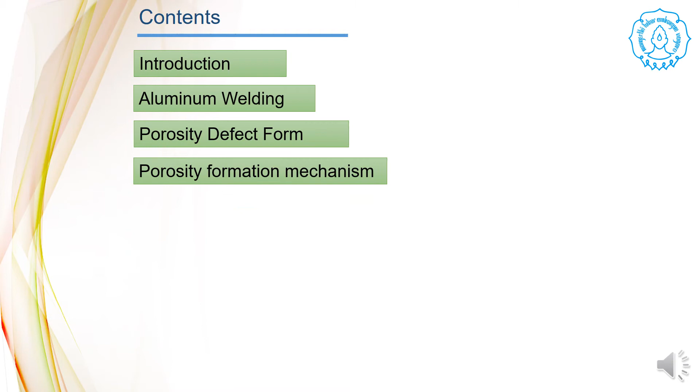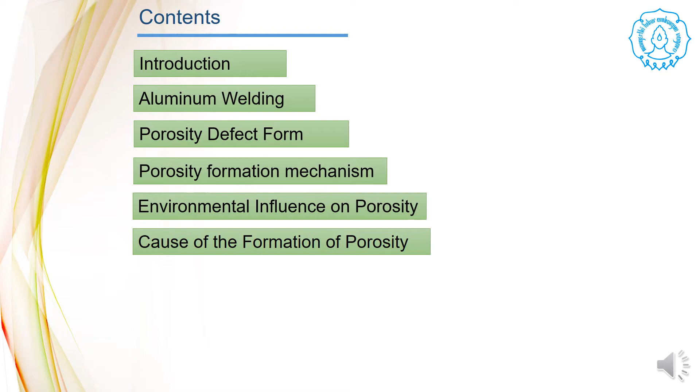Content. Number 1, Introduction. Number 2, Aluminum welding. Number 3, Porosity defect form. Number 4, Porosity formation mechanism. Number 5, Environmental influence on porosity. Number 6, Cause of the formation of porosity. Number 7, Impact of porosity on mechanical properties of weld joints. Number 8, Reduce porosity defects. Number 9, Conclusion.

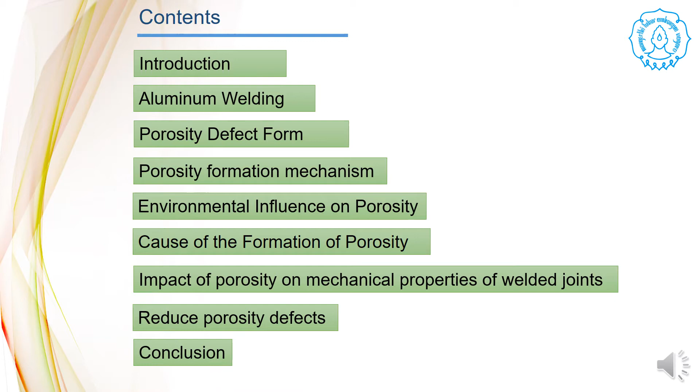Introduction. In modern times, aluminum is widely used in the automotive, railroad, and marine industries. Aluminum is widely used because it has the advantage of low density, high strength, and corrosion resistance.

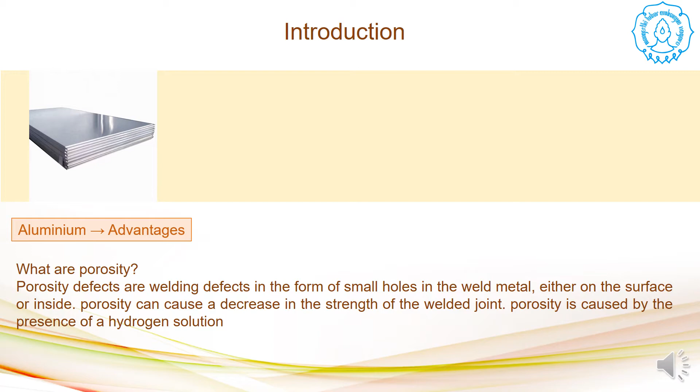Manufacture of marine vessels use a lot of aluminum. One of the shipbuilding processes is to use welding techniques because it has high strength, relatively fast processing, and low cost. Welding processes that are often used are gas metal arc welding and gas tungsten arc welding.

However, aluminum also has this disadvantage, namely the emergence of porosity in the area of the weld joint. Porosity is caused by the presence of hydrogen.

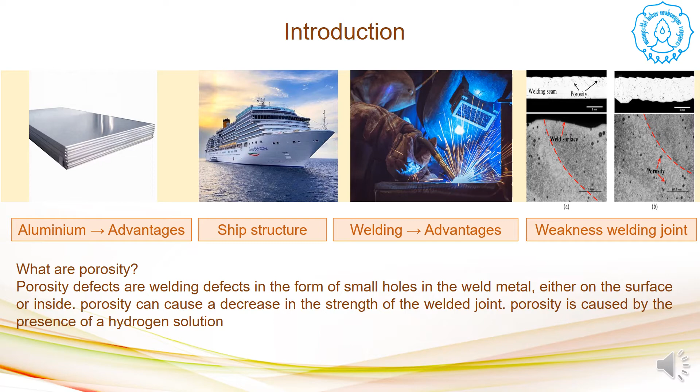Aluminum welding. Aluminum welding process usually uses GMAW, gas metal arc welding, GTAW, gas tungsten arc welding, and CMT, cold metal transfer.

GMAW process. GMAW is a welding process that produces metal fusion based on metal fusion at high temperature by forming a welding arc between the filler wire and the workpiece. The GMAW welding process occurs when the welding wire is directed to the workpiece. The welding arc will generate heat and melt the welding wire with the workpiece metal to melt together and form a permanent joint.

GTAW, gas tungsten arc welding. GTAW is a type of welding that is often used in ship construction welding. GTAW is the most suitable welding technique for joining AA5083 aluminum alloys compared to the GMAW process. GTAW welding has many advantages, including high welding time, reduced use of filler wire, relatively low cost, and low distortion.

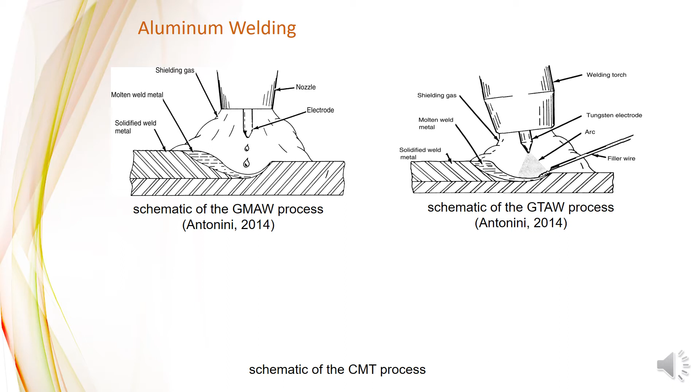CMT, cold metal transfer. CMT is a modification of the MIG welding process, has a low heat input process, and uses the mechanical droplet cut method. CMT welding works by joining material with a high deposition drop transfer method and low heat input, resulting in a very low spatter. CMT welding advantage is that it can increase welding efficiency, flexibility, welding speed, and tensile strength.

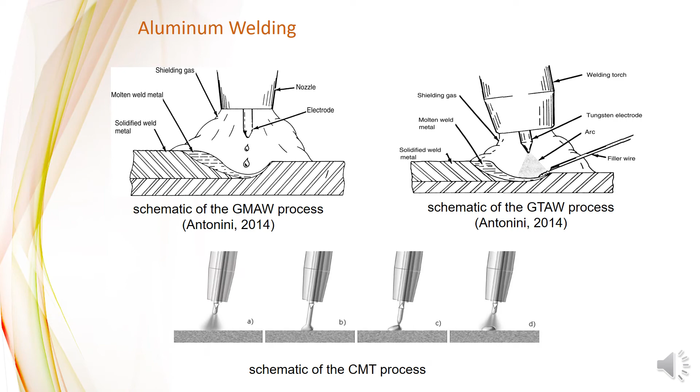Porosity defect form. Number 1, Microporosity. Microporosity is formed due to two mechanisms: shrinkage porosity caused by the shrinkage during the metal solidification process, and gas porosity caused by air trapping and undissolved hydrogen. Microporosities are generally below 5 millimeters. Microporosity can cause reduced tensile strength and fatigue.

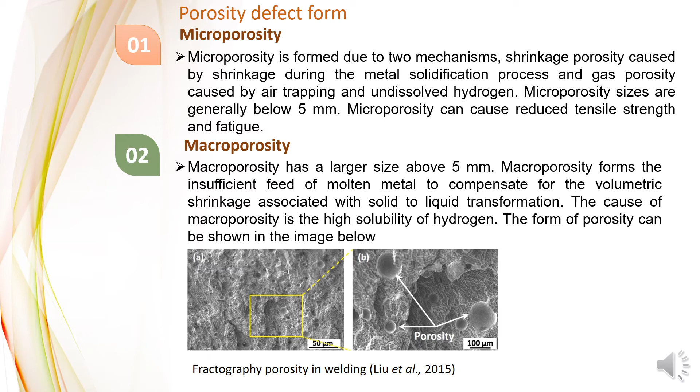Porosity formation mechanism in welding. Porosity can occur in the MIG hybrid laser welding process. During the MIG hybrid laser welding process, H2O reacts with the molten metal to produce hydrogen atoms. Hydrogen atoms are easily dissolved in the molten pool at high temperature. During the welding process, the hydrogen atom solubility can decrease as the temperature decreases. The solubility of hydrogen atom in the molten pool can affect porosity formation.

The porosity formation mechanism during MIG hybrid laser welding can be seen in the figure below. During the heating process in MIG hybrid laser welding, the molten pool area contains a solution of hydrogen atoms. The dissolved hydrogen atoms form bubbles. The movement of hydrogen atoms is influenced by the flow behavior of the liquid metal. The cooling process causes the solubility of hydrogen to be reduced, and the hydrogen bubbles cannot escape from the molten pool of melt, causing porosity. The shape of the porosity is irregular and has a larger size.

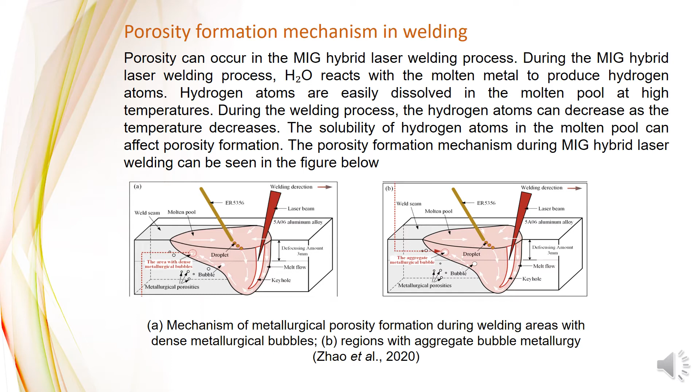Environmental influence on porosity. Number one, air temperature. Air temperature is one of the environmental parameters that affect the occurrence of porosity in a weld joint. During the welding process, porosity usually appears in the weld metal area due to the high solubility of hydrogen in aluminum at the aluminum melting temperature. The increase in air temperature causes the solubility of hydrogen when the aluminum is melted, and in welding, melting occurs, which causes hydrogen gas to be trapped in the weld metal, resulting in porosity.

Number two, humidity. Porosity causes a reduction in strength in the weld joint. The content of diffused H ions increases with increasing water vapor pressure in the air. Therefore, increased humidity affects the formation of porosity. When humidity is higher, the weld microstructure grain becomes coarser, and the size of the porosity increases in the fusion zone and the heat affected zone.

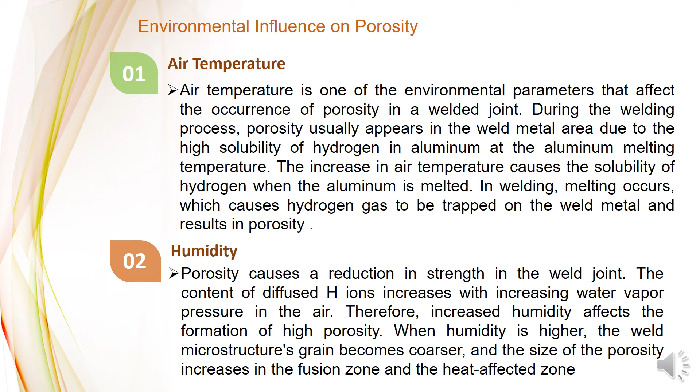Cause formation of porosity: differences influence the formation of porosity in the welding process due to the difference in the solubility of hydrogen between molten aluminum alloys and solid aluminum alloys. In the welding process, porosity defects can occur and cause stress concentration. The porosity that often occurs in laser welding is metallurgical porosity caused by hydrogen in the molten pool.

Apart from hydrogen, what can cause porosity? Environmental factors also influence porosity. The environments that affect porosity are air temperature, air humidity, and dissolved oxygen.

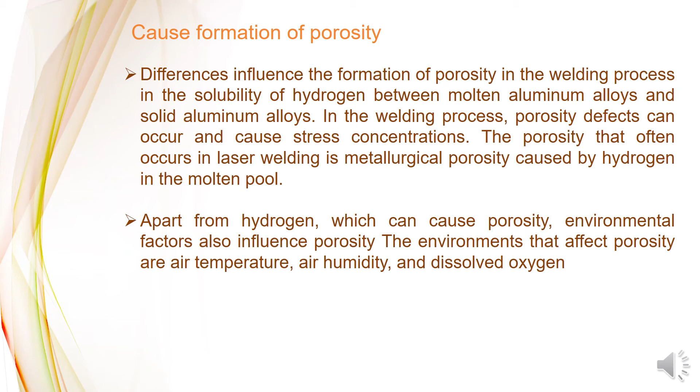Impact of porosity on mechanical properties of weld joint. Porosity has an impact on decreasing mechanical properties, which causes a decrease in the ductility of the weld joint, thus affecting the fracture mode when fatigue failure occurs, in addition to reducing the mechanical properties of the weld joint. Porosity can reduce fatigue stress and significantly reduce the weld joint strength. Porosity can reduce the weld joint effectiveness and reduce the tensile strength in the fusion region.

The table below summarizes several research articles on porosity that focus on the effect of porosity on weld joint. Number one, Gou et al. Material: A7N01ST5. Method: weld joint for high-speed train. Subject: effect of moisture on the microstructural porosity and fatigue strength of the A7N01ST5 aluminum alloy weld joint. Finding: increased humidity causes an increase in porosity and causes a decrease in fatigue strength at the weld joint.

Number two, Han et al. Material: 6082 T6 aluminum alloy. Method: laser-MIG hybrid welding. Subject: effect of welding parameters on the porosity distribution, and the correlation between the porosity distribution and mechanical properties of 6082 T6 aluminum alloy welding joint.

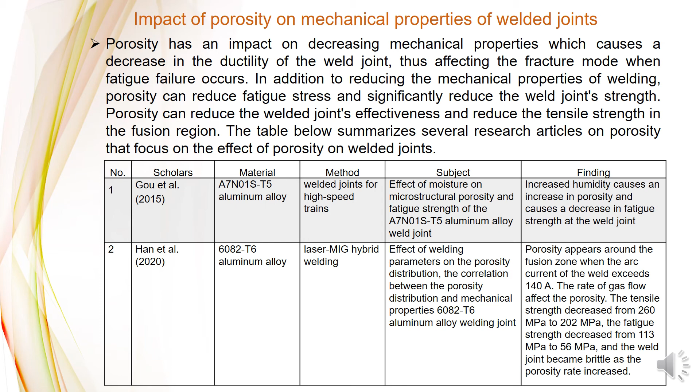Porosity appears around the fusion zone when the arc current of the weld exceeds 140 amperes. The rate of gas flow affects the porosity. The tensile strength decreases from 260 MPa to 202 MPa, the fatigue strength decreases from 113 MPa to 56 MPa, and the weld joint became brittle as the porosity rate increased.

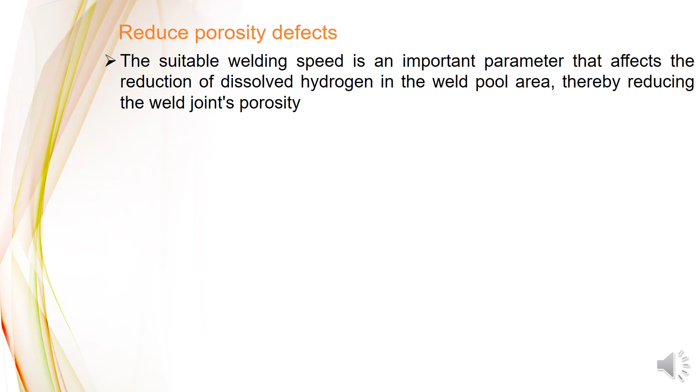Reduce defect. The suitable welding speed is an important parameter that affects the reduction of dissolved hydrogen in the weld pool area, thereby reducing the weld joint porosity. Several factors that can control porosity are low heat input, fine grain structure, and effective removal of oxides from the wire.

A suitable torch position, optimal welding condition, and a suitable welding range can also control porosity in cold metal transfer welding. The addition of CO2 and He in the shielding gas and the suitable torch angle can reduce the porosity. The precise control of the shielding gas parameters, including the different flow rates, the blowing angle, and the shielding gas distance, is also a determining factor during the welding process in reducing porosity.

The right environmental parameters can minimize the porosity. The wind speed and humidity that are suitable during the welding process can significantly reduce the porosity of the weld joint.

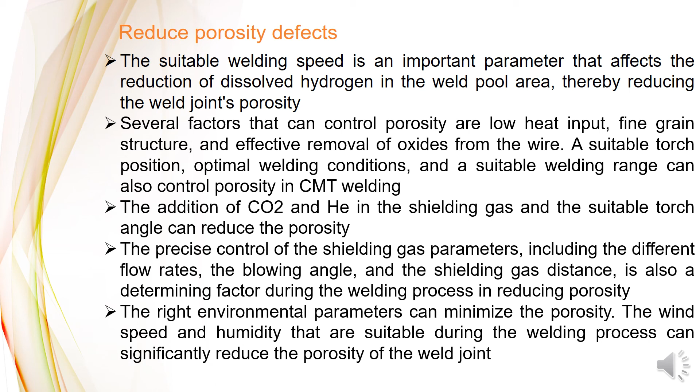Conclusion: in the welding process, the welding defect that often arises is porosity of the weld joint. The form of porosity in the weld joint is usually macroporosity and microporosity. Macroporosity generally has a bigger shape than microporosity. The formation of porosity is generally caused by dissolved hydrogen in the weld metal, air or bubbles from the welding process, failure, and the influence of the environment around the welding.

Environmental factors that influence porosity are erratic air temperature and humidity. The impact of porosity can cause cracks in the weld joint, decrease ductility, and fatigue failure. However, porosity can be prevented by setting the appropriate speed parameter at the time of welding, optimal welding conditions, suitable welding ranges, and maintaining environmental control.